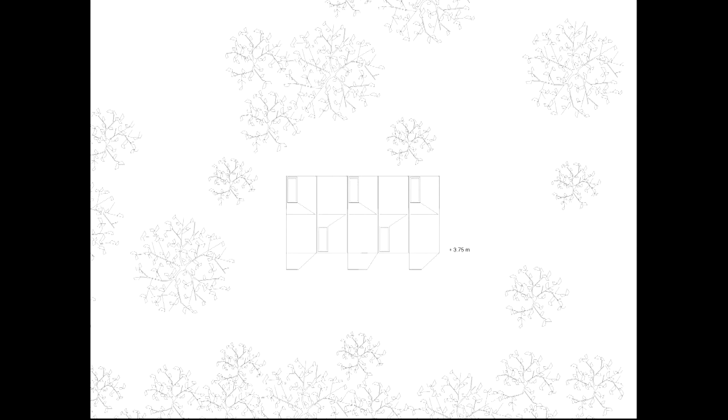in the ground plan looking like a Lego game. It's actually a stacking game of containers, and the content is still simply for the boys and for the girls, for the men and for the women - the sanitary facilities - but still it's something more than that.

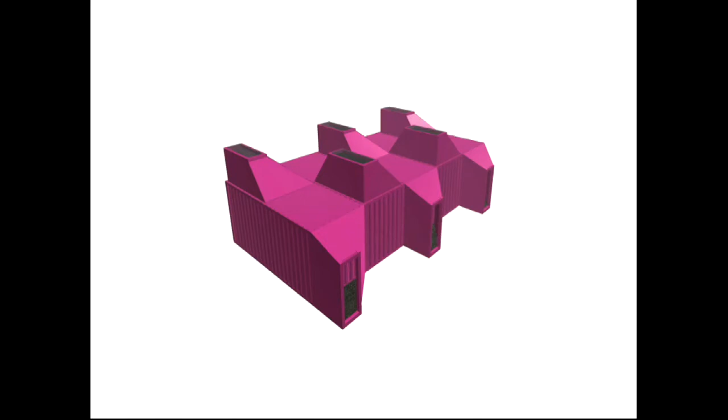So it's actually a game of adding elements to an industrial stereotype container, and defining a shape that basically sticks in mind, and is something that you remember.

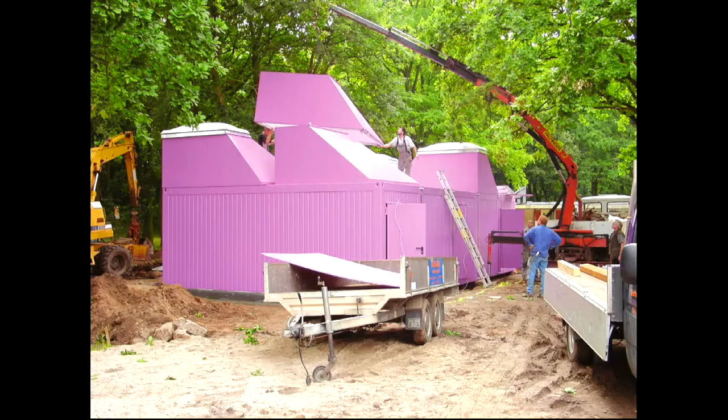There's also a process behind it. It's a process of production, so it's stacked easily. All these containers came pre-fitted with the sanitary elements, and the only thing that was added to it was these roof lights, because there's always the issue of vapor and odors in these sanitary facilities that have to somehow get out of the building, and mostly the windows and ventilations are too small.

But these are quite large roof lights and some kind of small entrance. So it's also a question of privacy. How do you enter even this kind of small house? You want to enter by an entrance, not only by a door.

So this was one of our very first projects. Right now it's like 12 years ago, or 13 years ago. And also in these very early projects, there's a focus on detail and on things that basically work together with the environment. So this camping site is for kids.

So it's also like a kiddie language of elements and things. And then there are also elements that you can find here in the building, like these lights, for example. We discovered them for this project.

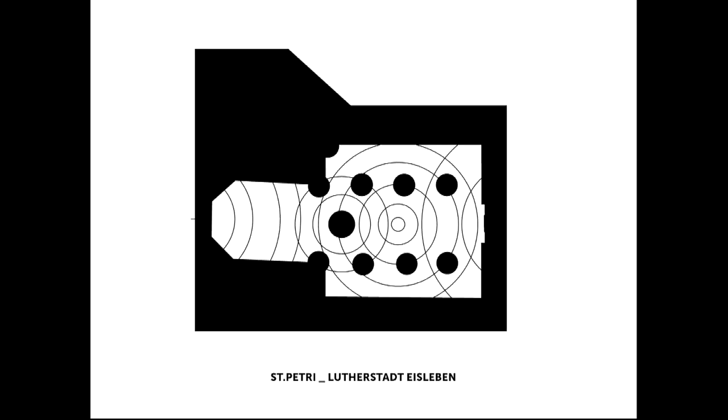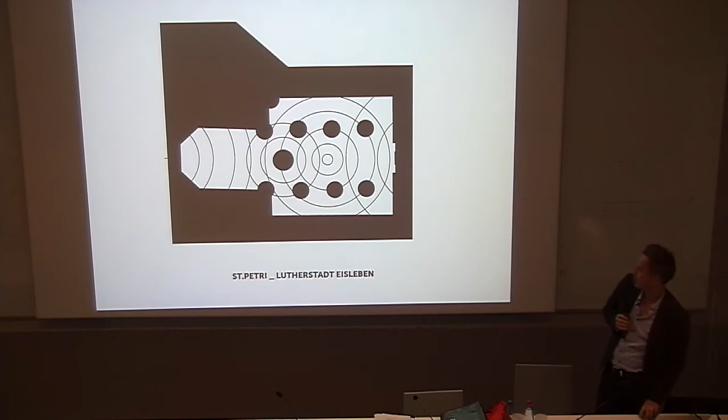So let's go to something else, something more historical, traditional, something which has another significance actually. It's the Lutherstadt Eisleben. There's the baptism church of Martin Luther. It's called St. Petri, and we have been asked to do a project on the St. Peter's church. So this is Eisleben.

But baptism in a very large way, so in a very historical way as well. So it's about baptizing somebody with the whole body, going into the water and feeling the River Jordan basically, a very American way of baptizing.

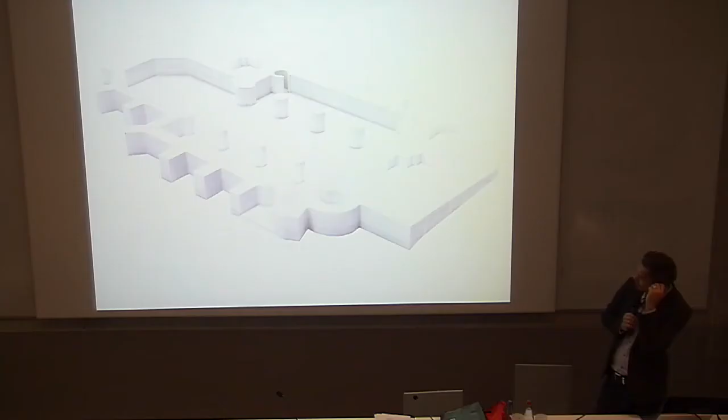So what we did first was to build a model of the elements we could work with. This is a model of a section of the building, 1 meter in height, basically a ground plan section. You see the basic structure with the columns and the walls - everything is totally listed and untouchable, basically.

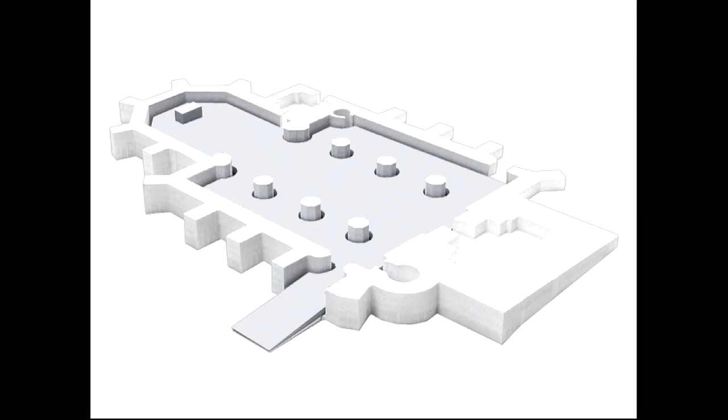And we decided to integrate one element only - I think you cannot really see it on the beamer projection. It's a concrete slab which is taking over a lot of new functions in this building. It clarifies the entrance, because today an entrance in a church or any public building cannot be with a step or a stair - there has to be some ramping, some access-for-all idea behind it. This concrete slab also integrates heat, so there's a heating system inside it to heat the place, and it also integrates, in a way, the baptizing.

What is important about this element is that it is totally readable - you see it, it's everywhere. It's never touching the existing architectural elements, and it's respecting the historical elements as well. It has its own identity, and that identity comes from us - we projected the identity into this element.

We could have also done just a concrete slab with a certain roughness so you don't slip on it, but we decided there had to be something else to it because it's important to the place. So we searched for things to help explain to us and to others what to do with this concrete slab. We thought about framing elements, water drops, and so on, and finally it made us come up with the idea of a pattern being first projected and then engraved into this concrete slab.

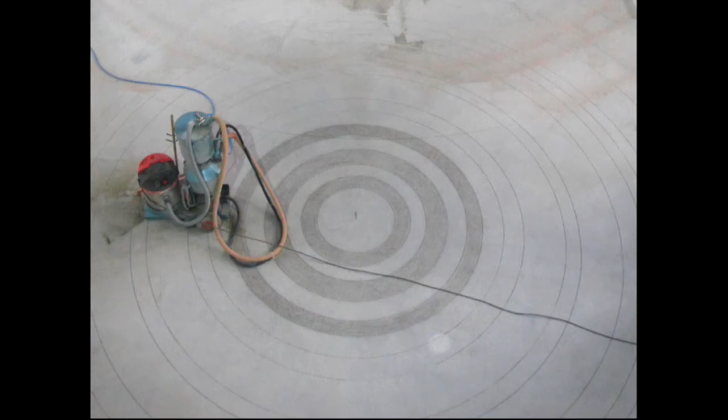What's interesting to us, since we're kind of obsessed with tools and process, was to find a way to make this engravement actually happen. Because you can't just write a paper to a firm and say 'we want this pattern on the ground, please do it' - nobody knows in the first place how to do it. There's no photographic or photo-concrete method that helps you there.

So in quite close coordination and communication with the contractors, we found a way to apply these graphics to the ground. Basically we find mid spots as we build it up - this guy drew it up into the ground, and it was quite interesting. This is the final result of it, and it sort of blends into the surrounding, but it's something quite unique and quite special.

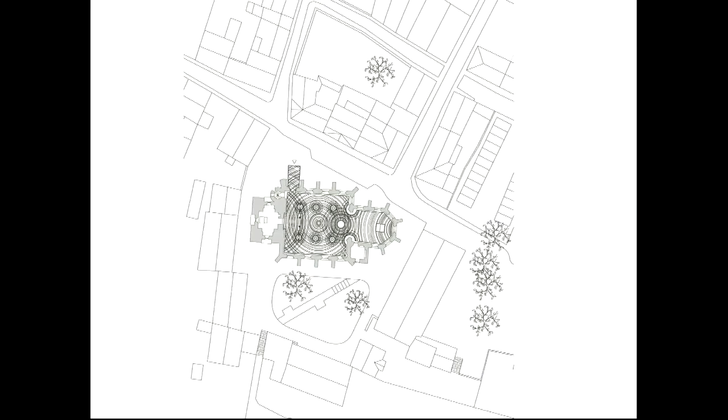So just quickly, some pictures of it.

Second element in the place is the furniture. Of course you can always pick up a catalog and find a bench—there's 100,000 benches you can choose from—but you can also try to tell a story with the bench. And with Martin Luther, it's a little bit different.

There's this story about Luther and his idea of planting a tree—even if there's only one day left, you would still plant a tree. There's this connection to trees and to wood. So we thought taking a closer look at the wood would be important for this design.

We selected a lot of different woods from this region. It's a farming region, and they grow all kinds of trees—apple, plum, cherry, whatever. You buy a lot of these fruits in Berlin as well; when you buy fruits, they mostly come from there.

So we said it would be interesting to design a bench that works without nails and without screws—just stacking, basically a handcrafted connection of the parts using different woods.

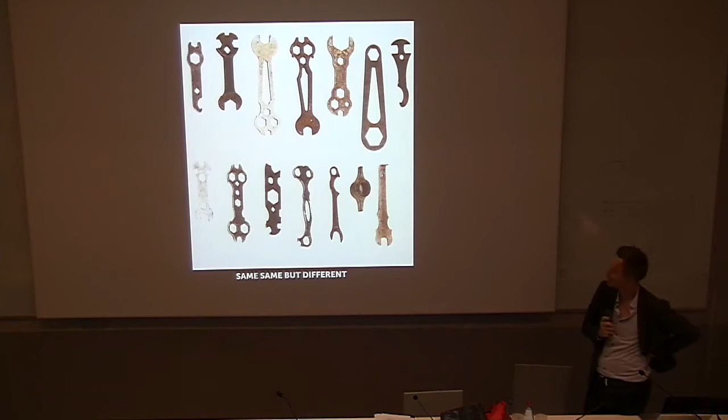Tonight at the gallery you'll also see a selection of tools—everybody knows these are tools for bikes, and basically most of them contain the same function and fit the same sizes of screws.

But take a look at the variation of these bike tools—there's also modern bike tools that are smaller, that fold, and so on. These are older ones, but still there's a variety, and some kind of significance to all of them.

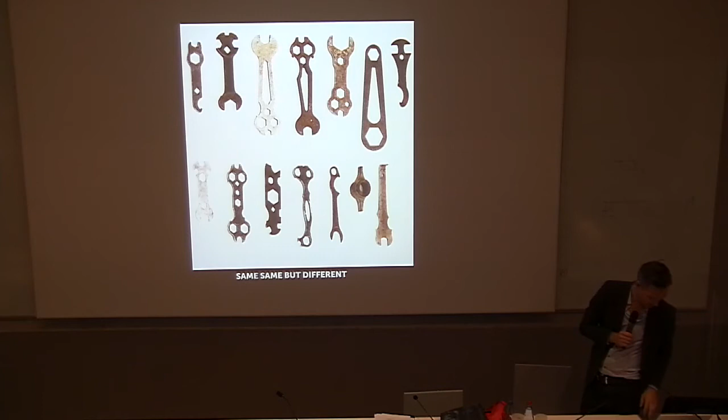There's a reason why somebody made a choice among all of these tools, and it's not only a marketing choice—someone thought about it and then made a choice. Some are more handy, and sometimes the diameters are closer to each other, so it's easier—you don't have to change your hand. They all have a logic, and if you think about it you can see a lot in them, but you can also just use them.

This is the ground plan of the city of Berlin before the Second World War, or one part of it. What you see are blocks—it's a Hobrecht plan, a very large extension of the city by the end of the 19th century, and the basic element of these extensions has been basically blocks.

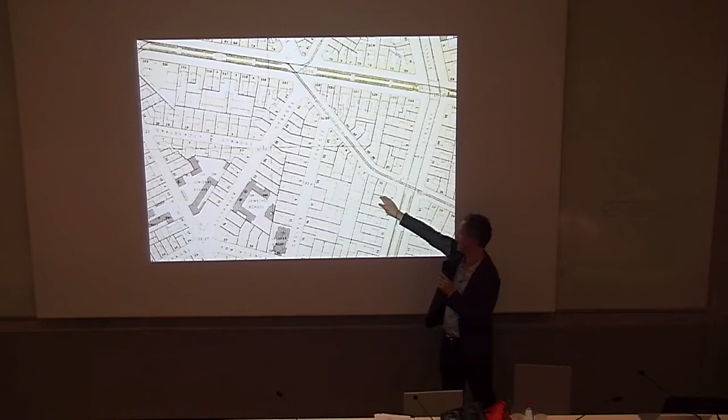The blocks usually contain courtyards, and the plan is nice because it shows in black the public buildings and in yellow the apartment buildings. What is black and yellow in the plan is also identifiable in materials in the historic city.

In the historic city, in Berlin, the usual apartment buildings are made with plastered walls—they are painted and have no identifiable material. It's not like in Paris, or sometimes here, or in many places in Strasbourg, where you have sandstone apartment buildings. In Berlin, it's not like this.

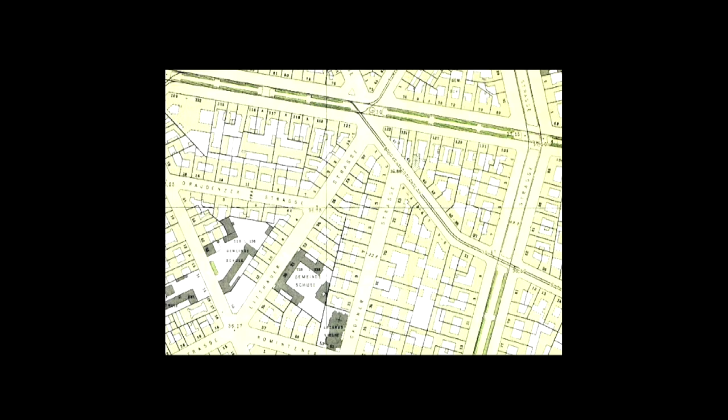So most of these buildings are just plastered. And then the public buildings, walk through the city and everything was public—churches, schools—they've made in bricks and the rest in plaster.

There's some of these blocks left, and they have been basically repaired in the last 20 years. But then you see all these fragments. Some of them have been added in the 60s and 70s, but some are just accidental fragments in the city space.

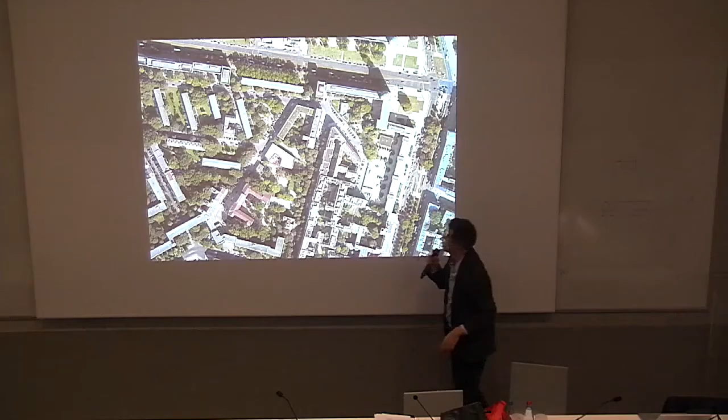And from a school which was part of a block, which was supposed to be part of the block, which only had one facade basically and a courtyard facade, all of a sudden became an object, like an objet trouvé, with different angles and edges. Our task was to add a building to it, to a larger campus basically. So the building in the north is the addition, and we had to play a new game in the city at this time—we had to play with objects, not with facades.

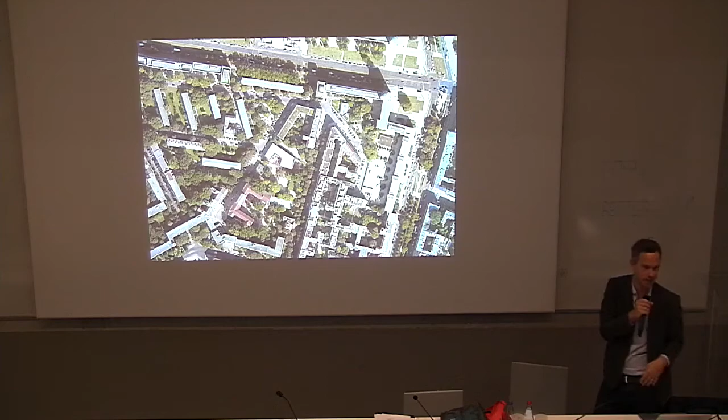The same thing happened in another place—this is the two schools, and I will present them in parallel. It's the same thing, a little bit of another situation in Berlin, but you still have the former block school there, which is now like an object in the city space, and then there's all these fragmented, sometimes wildly grown elements around it.

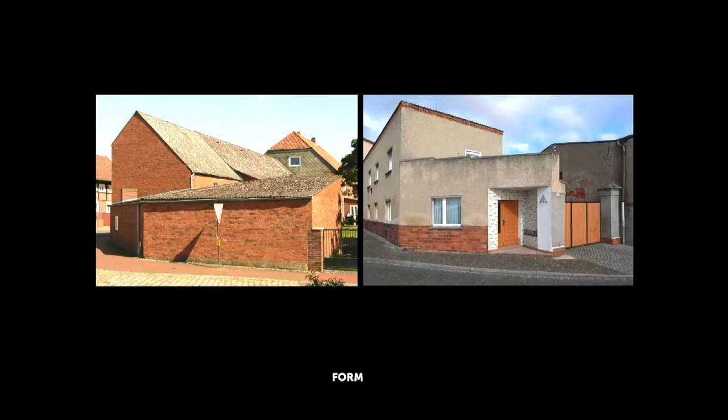So the question is, you're dealing with these kinds of things—you're dealing with forms. Sometimes they are accidental, sometimes not, but they exist and they can inspire you as well. You can find a lot in these twisted, changed, modified, destroyed, rebuilt buildings, and our new buildings that we've been adding are also objects, with the same kind of language in a way.

So there's also these tilted roofs, some overlapping, some overhangings, and even when you show this picture or this picture here, basically all the decisions that we make have to make sense, but also they make an object.

The ground plan is the same type of building—it's a building which is wrapping around a courtyard. So the courtyard can have very different qualities. These schools are both primary schools for small kids, so there's also a way of protecting and containing something—this is like a contained playground basically.

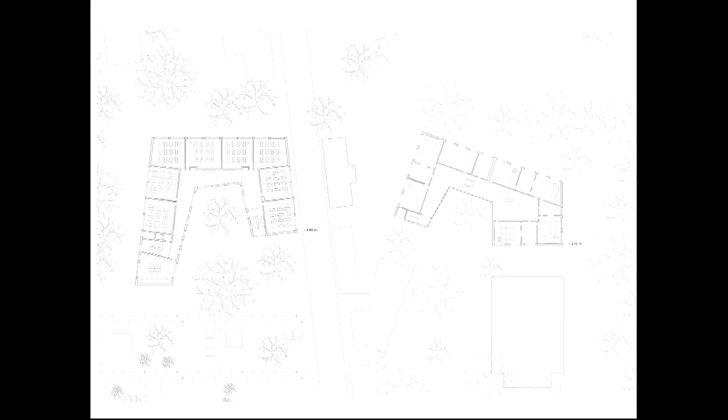But a courtyard in a school setting can also be an entrance. So what is remarkable about these schools is that they have the same ground plan, but they have very different elements inside.

This is, for example, a corridor, a school corridor, which has been expanded in order to contain new functions like playing places and all these lockers. And actually, when it's bad weather, they can also keep their school bag in there.

But the corridor can also look like this—a little bit more serré, as you say, smaller and compact. And the elements are not freestanding, but attached to the walls. You can play around with these elements in a very characteristic way.

We just show these images to give an idea how much surfaces and materiality can influence a place. What is important is that it's still kind of an understandable and credible choice that you've made.

So one of these schools has an atrium, and we worked a lot on the idea of how this atrium could work, what function it has. This atrium has two staircases, like two stair wings going down and meeting at one basic point on the ground. This is very important to us, and it influences the design very strongly.

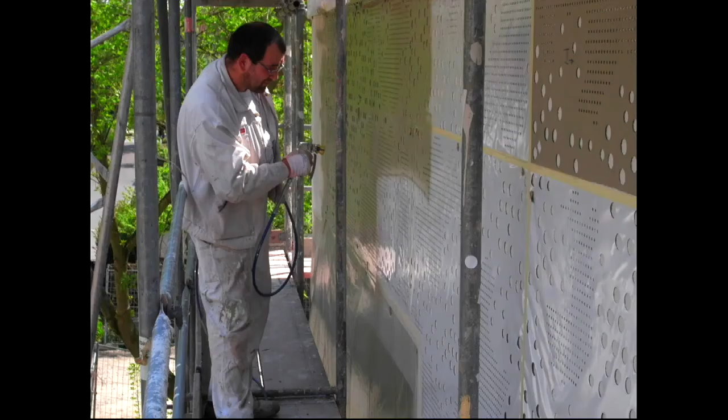Or it can relate to something else. Like here, for example, in the other school, there was an element, an object important in the interior of the building. It's this curtain that basically shuts the garderobe, and this curtain has been used in different ways in this building. It has been used as a curtain - this is a Swedish snow military thing basically that they use in Sweden - but you can also use it as a stencil, basically to put texture on a building.

In this case, this is also the same scale as the images of the bricks. So this is what we basically apply to the building, and the effect in the end is some kind of camouflage effect - camouflage in a very wild and random urban situation, but also something unique and functional, because there's a lot of graffiti going on in this area. As we already prepared a very strong graffiti-like pattern, there has been no graffiti on the school yet, so it is already coded, and this is important.

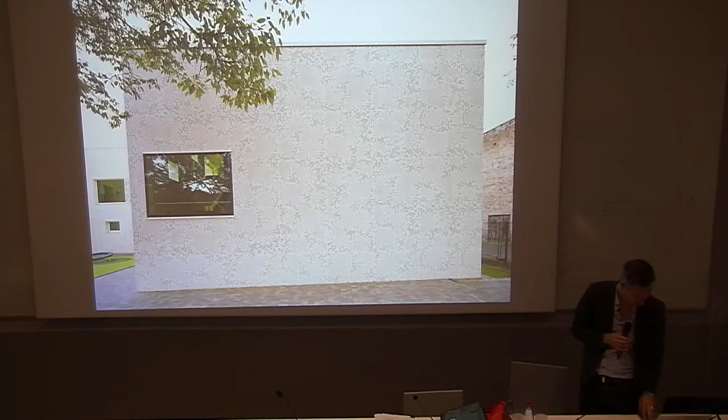Do you have energy for more projects? Martin, do you want to go on? Of course, yes. It's good to switch the voice maybe, so it's not so boring.

In this presented project, there's also this kind of discussion. The first one, this small one, which was more referring to Lego, was when we presented to the client. We came up with a small rendering and presented it to him, and he said, 'Oof' - he was out of words. He said he never saw this thing before, but remembered it a little bit because there was this kind of Lego before maybe, and then he said, 'Just do it.' Then we had three months to build it.

So this was the first way to do it, and also the children finally accepted it. When we built it up, the same way the children thought about and communicated the project - for them it was Lego in the end.

Like that one, or for instance the church - when we did this, we said to the client, 'No, we will not do chairs like you had before. We want to do benches, because a bench is every time a thing where two people have to sit together, and this is the main opinion of a church, what we think - to bring people together and to share it.' So that was it, and the wood was also important to explain.

When we talked about the wood, churches today have this problem that only at Christmas are they full - the rest of the year they are totally empty, nobody goes there. So we said, okay, every chair or bench stands for a different personality, and in case only one person is sitting there, they still have different mentalities in the room with this different kind of wood. So there were a lot of layers to speak about this perception of projects, which is quite interesting. This makes it a little fun or passion to keep in the project finally, or later in your profession, because designing this kind of architecture, you have to ask your teachers.

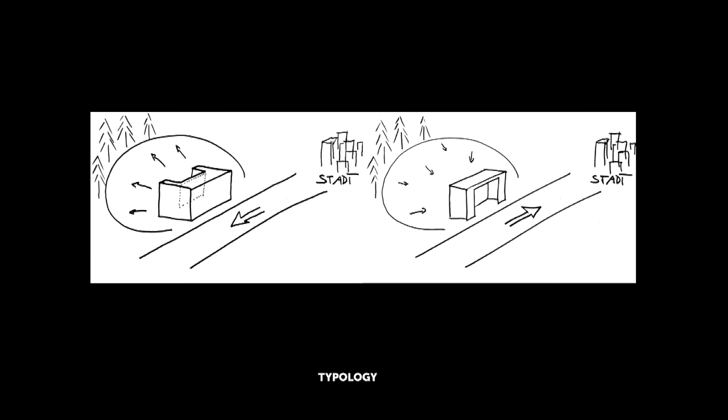So this was a little bit the story when we started to talk, to find our way. The second idea was that the place was usually visited in winter for randonnée, just walking on the snow. This is the perception of nature when we go there - we are most impressed by the possibility to read all the traces, animals you see, and discover things we usually don't notice when walking inside a town.

So traces could still be a story in the discussion. Of course we have this kind of traces as reference from art, or also from natural catastrophes like tsunamis - this kind of traces. So we thought maybe we could develop the project out of it. We added 10% of the volume to it, and we solved the sanitary facility because it was just a place to stock material.

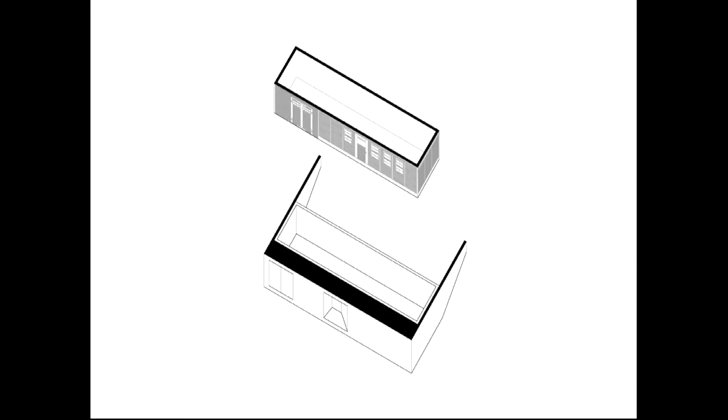And we add the 10%. And we open the whole house in the direction of the forest, which is the dream of the client, to see the green, and open the window there.

And then we're still working every time a little bit on this question, what is reusable and what we can integrate in the project. So we said, okay, maybe we can convince the administration that we keep the building in a certain way, but it was not written how you have to keep it in that sense.

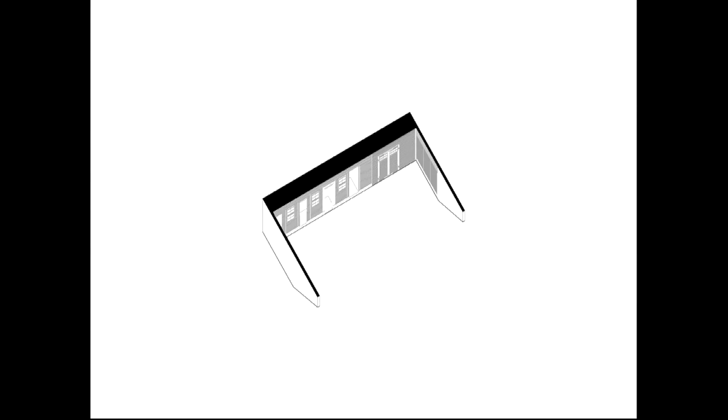And we said, okay, we use it like a scaffolding and a framework, and find an enterprise who goes with us this way, which is usually also difficult to describe to the contractor - to say just use the house as a framework. And they say, no, it doesn't work, the concrete will flow everywhere. And they say, yeah, come on, I change the windows for you, we put on some metal sheets, and we help you a little bit with this.

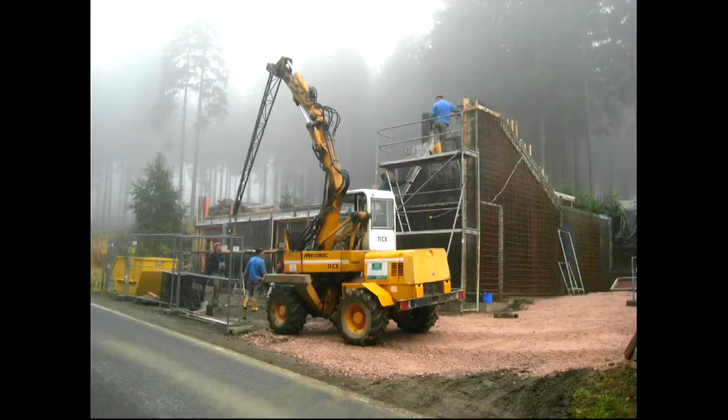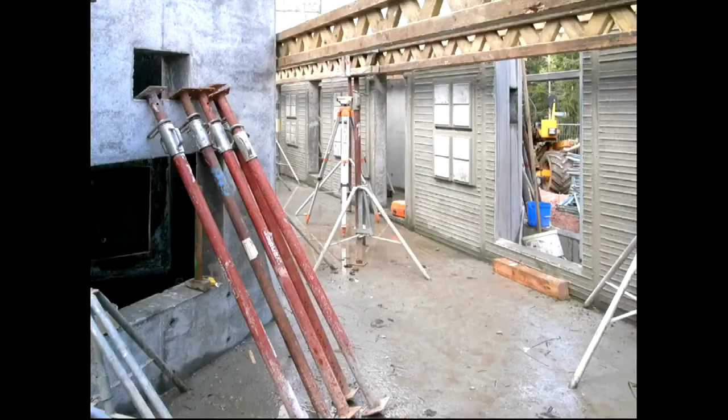So it was this passion of practice, and finally they went forward with this experience with us. So we used the house as a framework, and put the walls in between, and finally all the concrete, and the house was like an imprint of that.

So finally we kept the idea of the permission that we have to keep the place in one way, and the second way also we find this pureness in this kind of traces and this cold environment and so on.

And then we had long discussion with our building physics linked friends. We said, do we really need isolation for that? And they said, come on, that's a house for vacation, how often do you go? And then there was a calculation, okay, 10 times a year - that means just make a huge fire inside, and then it will be warm.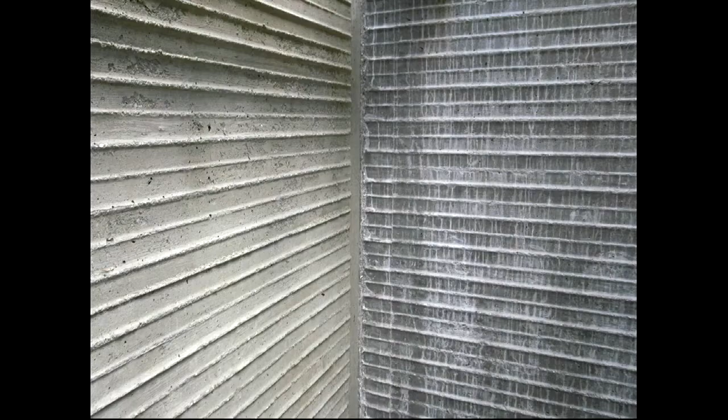And then when you leave, forget that maybe. So it's maybe a hard place to educate also what is coldness. And well, you will see it soon.

So we did this, and the imprints were very nice, and then we had the discussion about how we order the elements inside. And again, we had this discussion internally about where we put the things.

So there's this reference like a pamphlet of architecture, this nice collection of houses referring to the European farmer's house, and there's every time this relationship between fire, animals and humans. So the farmers very often used the animals also to heat the house, and there was also the central place of fire. And then you know also this reference here, which is also a very iconic one.

Because this form arrived with the invention of the oven. When the Europeans went up north to the Inuit, and they were bringing up this oven, they started to build also the house around this kind of form. So it was a form of the heating system.

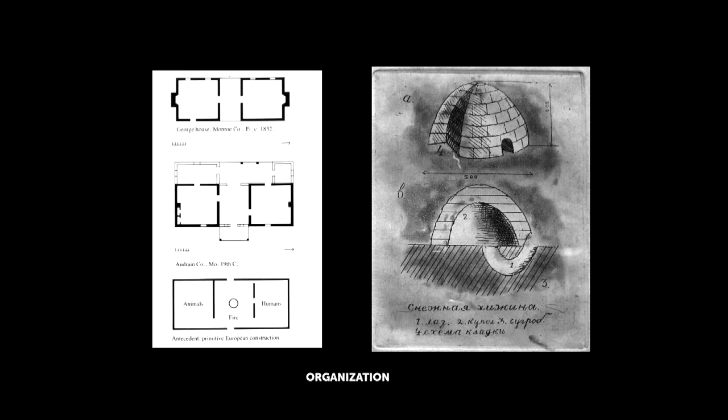So that's why it was quite clear - we said, okay, the fire has to be in the middle, and that's the place where we meet. And as far from the fire, it will be colder. So you have 100 degrees on the oven, or 200, and you have minus 10 on the wall maybe.

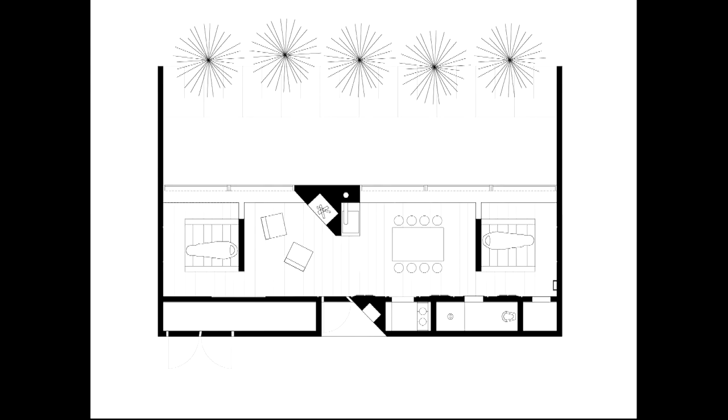So that was a little bit everything, theory in the beginning. We did these nice drawings and we said, okay, if you want to sleep, everybody's equipped like that, you can survive with that. And then it's really like this - if you go there, you need a kind of cooperative hand-to-hand work.

And there's really that oven, which we found in manufacturings of Swiss steel workers. They still do that for the mountain huts. And every time when the people go there, it's quite amazing that there starts really a discussion about what we need really and what is not necessary to have.

So, for instance, if you go there and you eat, you have to clean your table. You cannot leave something on the table because you have a problem of waste, you have no water to clean it, and so these things arrive in this discussion.

And then the people are sitting very close, they need more warm things, and when you sleep really like that, like cocoons with everything closed - because the wall really, you have also this impression, you see these ice flowers like you have in the fairy tales or in the grandmother stories.

And then there was another discussion about how we create the interior for that building. Again, you have two choices. You can work with the material which is there, meaning you use wood, create furniture out of it. Or you deal with this kind of industrial waste, usually what we have and what we produce around us.

It's a little bit the place which is far, far away, like the restaurant at the end of the universe from Douglas Adams. So what is there? We said, okay, we try to do everything out of the waste of industrial development, and one huge part is, of course, the car.

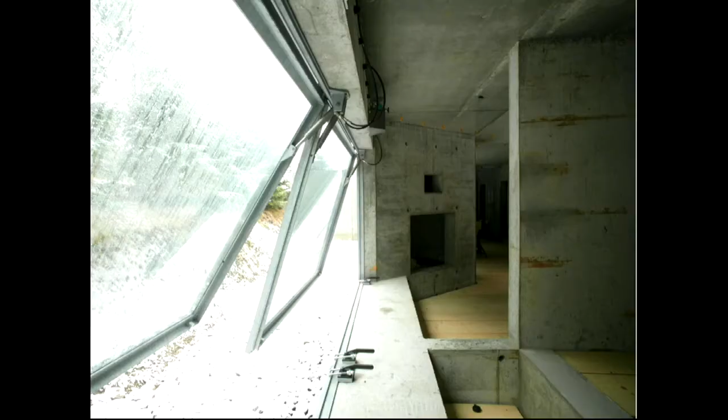And then also for the openings, for the huge windows, we found this nice detail you usually have when you open your car's back side, this pressure, oil pressure thing. We integrated this together with our friend who has a steel manufacturing business, and discussed the detail there, going up to the higher level, there's a small top window, just the steel that you use there.

And finally, every time when you go there, you have your high-equipped sleeping bag to survive, and you really have to close it, as the wall is minus 10 degrees, but it's still a place of nice accommodation. And you have to pick up the wood in the forest, and then you go there.

And finally, this is a perception. You're really looking into the forest, and from the street side it's really this kind of bunker which preserves the internal place. Also the doors, finally we decided to do them in concrete, so they have a huge weight, and you open them like a safe, and then you enter into this huge panorama from the backside door with the view into the forest. This is a little bit of a breathing-out view, but winter I think will also come soon.

Maybe let's say one small one to finish the lecture, some renovation work, which I think in our European context is also more than 50% of our work, because we're confronted with a lot of architecture which is still around us, and we have to find strategies how to deal with them. Very often we have to convince clients to keep the architecture, not to destroy it, and to find this kind of identity which a lot of buildings have. I think more or less with every building you can do something.

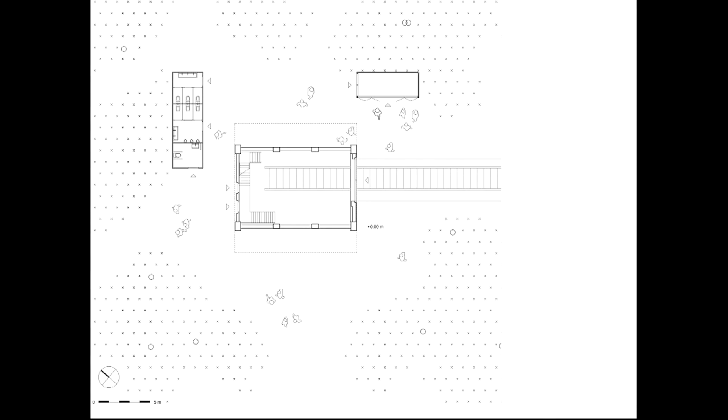So there are the additional parts around - you see the toilets, the office, what they had there, and you just play with these industrial prefabricated elements. The container you have, which one can open on the side, and you have each window - they're quite interesting also to define this kind of details.

So that means sometimes designing architecture is really also small steps. It's not this huge, let's say, defining ideas and rising up - if I don't know, I have to do everything new. It's also sometimes more or less small interventions you can do, and that is maybe a thing to really rethink carefully what is existing, what is there, and to deal with it, and then also try to find a story behind that.

And so I think that's our responsibility, and also what's rising up now in our discussions, what we're also doing with the students and in the office - this question of the moment: since the last 5 years we have a rising building industry, so everybody is proud, no, it's worth to study architecture. When we started studying architecture, our parents got grey hairs - they said, oh God, no, it's a crisis and nobody builds.

But what is interesting today, I think, is to be a little bit precise in this question of resources we have, because this rising building industry building everywhere also raises the question of what's the valuable material we have. Sometimes decisions get made only like, okay, we do it with this type of window because I can get it on the market, it's cheaper like this, and nobody asks about the long-term view of things. Also all elements used today in the building industry get glued together - you cannot dismantle them, so they're composed materials. We have a lot of, let's say, responsibility for that.

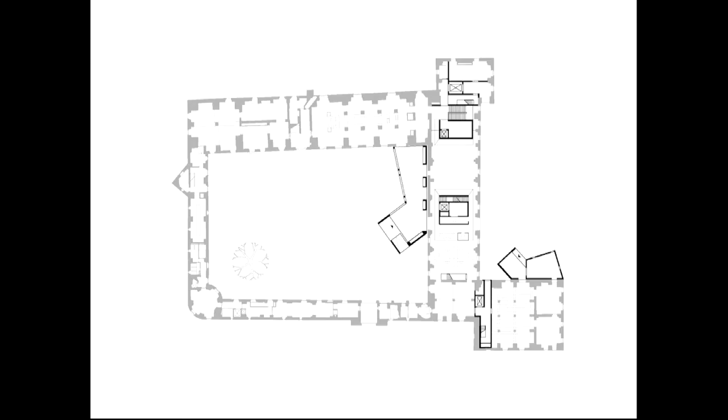No, it's French. The color maybe goes back to a project we did, a restoration of a huge castle. It was in a small city which was very rich in the 11th century because they found a lot of silver, and there was a competition to restore this castle and use it for a collection of minerals—a huge private collection, and also a depot for all the literature about mining that they had.

The castle was an ancient Renaissance castle which was reused by Napoleon as a corn depot. So it was a very old corn depot and also part of a very old Renaissance castle, and now they had to transform it into something. We went there and tried to be passionate about that.

We started very fascinated to go with them into the mines there, because they still exist. This was an incredible architectural impression for us, because you were surrounded by monochrome earth and ground, 800 meters deep, or 400, and it was hot. Then we also visited the salt mines, which was quite an impression too, because it's interesting.

That way we learned a lot about techniques—about the development, how they did everything in the ground, which was very related to the techniques. They had very small tunnels you had to dig by hand.

Then we got this relationship to the kind of druses or minerals in this collection. For us it was incredible, because for every mineral we asked the scientists, come on, this isn't natural, you made this in a CNC lab or something, because they're crazy.

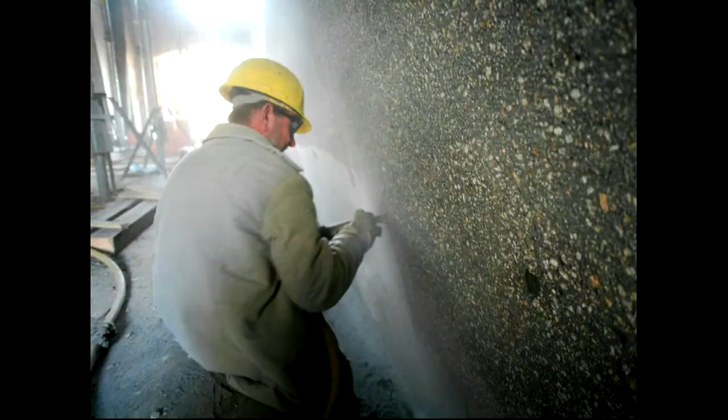So we rose up in this project to convince the client also for the building, to say okay, if we start a little bit this perception of this monochrome colored room, it's like protecting an idea and keeping it together.

For that project we did one of the magenta rooms, the entrance zone, and another one which is the internal courtyard for the administration. They work there on documents, and we said okay, when they go out from reading documents and get tired, then they go into this courtyard and it's like being in a great forest rising up with oxygen. So we found this way for them in three particular places.

So this was the first impression of what we did. Then, of course, as an architect you try to be repetitive in that way—you learn something and then you develop it forward. That's why it was a little bit like the school you saw.

This was a very easy step from this point to another project developed in the same period. We said okay, if a school is also protecting from the sun and creating a friendly situation for the children, it shouldn't just depend on the weather—it depends first on the teacher, of course, and then there's another sentence: it depends, the architecture is the third pedagogue, or maître, or maîtresse.

We said okay, maybe we can also integrate that, and so this color also rose up. So these were the colorful stories.

The other way we usually use colors is that we really try to choose colors which have a kind of local relationship again. So we would never do a pink house in the forest if there's no reference. It was only with this Lego reference, which was very clear in that color long before—a clear reference to this kind of toy. So it's a little bit of color—it's not a passion, but it comes up every time in the discussion.